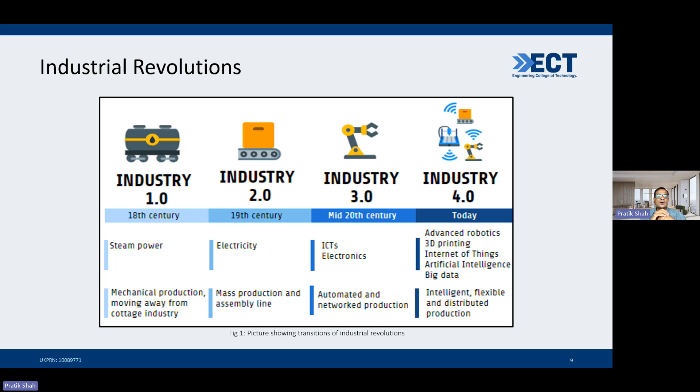So Industry 5.0 basically is an adoption of Industry 4.0 which is more human centric, more sustainable and more resilient. When I say more sustainable, the systems are meant to reduce the use or wastage of energy, and give sustainable solutions pertaining to environment friendliness, right? So with that, I come to what I normally call the building blocks of Industry 4.0.

Industry 4.0, as discussed in the previous slide, consists of the Internet of Things, IIoT, or you can say Industrial Internet of Things. Again, it has got a subset which consists of AI and ML, artificial intelligence and machine learning. Though we are not supposed to go into the details of each and every building block of Industry 4.0, we know the role of AI and ML, right?

We now say that machines which normally run for years are now bound to learn something. There is machine learning coding done which trains the machine to learn from the mistakes that it makes. It trains the machine with the help of AI codes, and it also helps in performing the task in a better way, right? We do have robotics as one of the components.

Data analytics: we say that today is the era of data, where data plays an important role, right? Because all of these are connected. When you have got a huge amount of data, only then can you go and build AI ML models, right? Cloud computing, AR, VR, that is augmented reality and virtual reality. I'll talk about this in my lecture also. We also have got blockchain, additive manufacturing, and system integration.

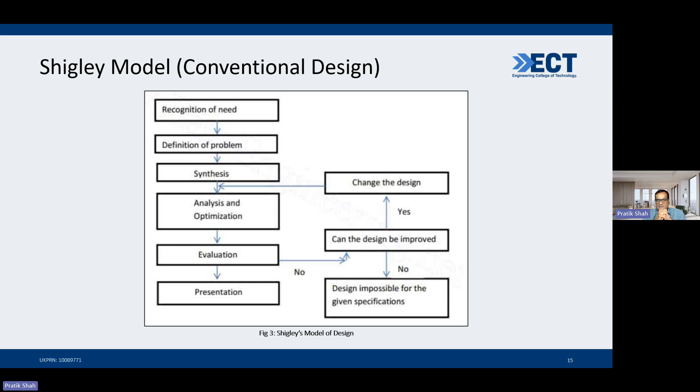But with the evolution of computer aided design, people now have changed the entire role of design pertaining to computer aided designing. So people normally say that when we create a model, it's basically a digital prototype. The first two phases though remain the same, that is the recognition of the need and problem definition. But the synthesis phase has now been taken up by geometric modeling.

We are having many softwares in the market which directly create a 3D model. So in the synthesis phase, where people used to use conventional drafters, drawing board, pencils, etc., they now use CAD softwares in order to create the solid models of the product. That would give a better visualization, better understanding of the product, what is being created.

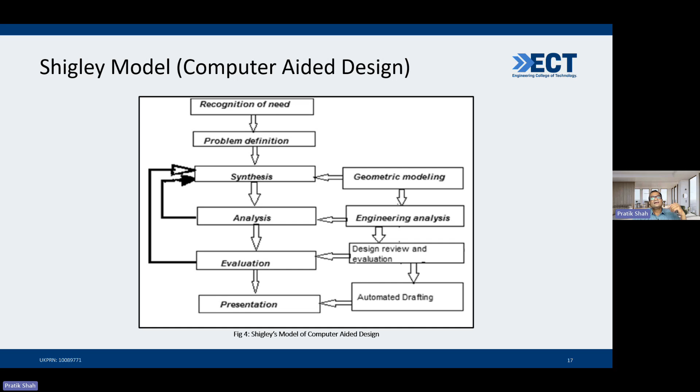Okay. So this is a brief about the evolution of CAD. It started way back in the 1960s. In the 1980s, we came up with a software called AutoCAD. AutoCAD is a product of the Autodesk company, and it is still widely used for creation of 2D drawings in industries.

Right? It is so popular nowadays that Autodesk has even made this software freely available. All the products of Autodesk are freely available to engineering institutes and engineering colleges. They are freely available for the professors and lecturers of the institute, and even for the students. So AutoCAD has got its own importance.

In the late 90s, solid modeling software like SolidWorks, CATIA, and Pro Engineer, which is now known as Creo, came into existence and slowly started taking over the designing phase. By the year 2000, the software became more collaborative and more interactive. And at present, what we are talking about is intelligent and

connected, where CAD systems are directly integrated with machines, and with zero intervention of human beings, they can create products. That has now been possible with the help of tools like augmented reality and virtual reality.

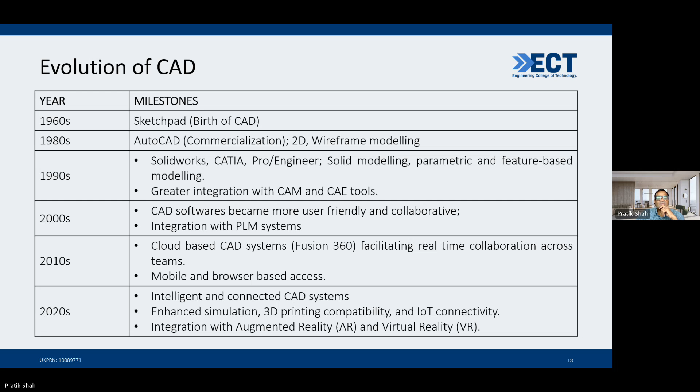I'm talking about these outputs for the purpose of letting you know that CAD is not only used for designing. It can also be used for creating various types of 3D models, that is surface models, wireframe models, and solid models. It can also be used for huge documentation; for example, if a company has around 200 parts which are to be assembled, it can easily help in creating the bill of materials. Again, rendering and visualization play a very important role in marketing the products.

So we'll talk briefly about the three types of geometric modeling features that are normally available with any CAD software. They are wireframe representations, surface representations, and solid representations. You can have a single product represented in all three ways: a wireframe of the object, a surface model, and a solid model. I'll spend 2 or 3 minutes on understanding this.

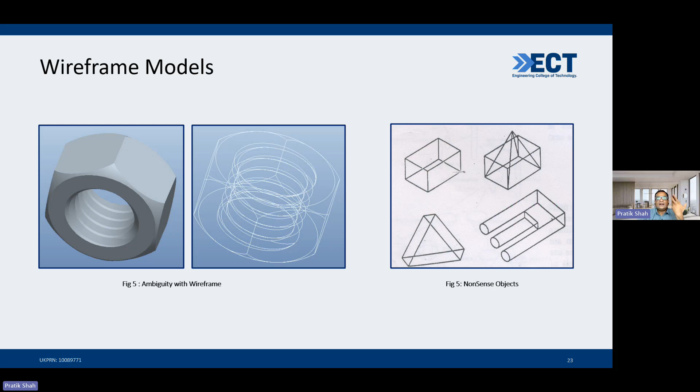It's basically a skeleton view, and to me, it's full of ambiguity because you cannot separate out the front face and the back face. All of them are shown with the same shade of line, posing some ambiguity in interpretation. So it was always used when there were issues of memory or storage.

So basically they were visual representations of 3D objects with only lines and edges. There were no surfaces, no planes, no solids. They were simple and faster to create. They were like a skeleton where all the hidden surfaces were also seen on the same face. But this created ambiguity, as several lines in different planes were seen on the same face.

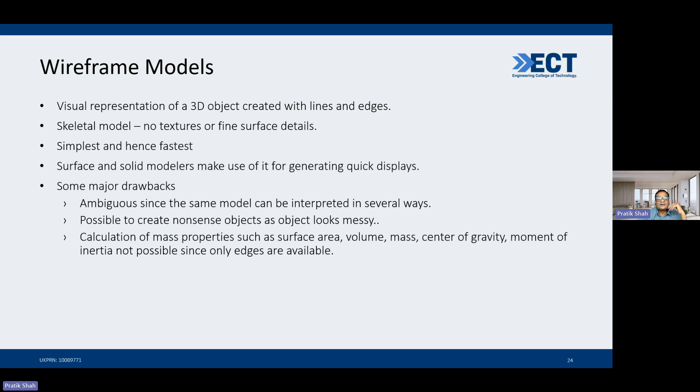Again, calculation of mass properties, volume, or center of gravity, which modern tools or a solid model give you, were not available. I just talked about a drop test of a mobile. In that case, the center of gravity or CG is very important. You won't be able to directly calculate the center of gravity. It is now normally done with the help of solid models.

Again, you can see an assembly of gears, which is in wireframe. And there is also an exploded model of a car, which is in wireframe.

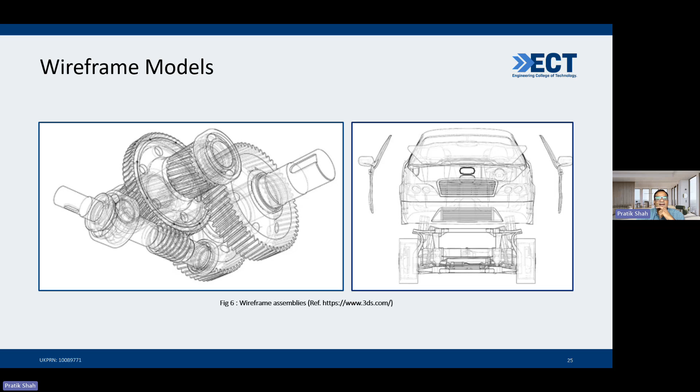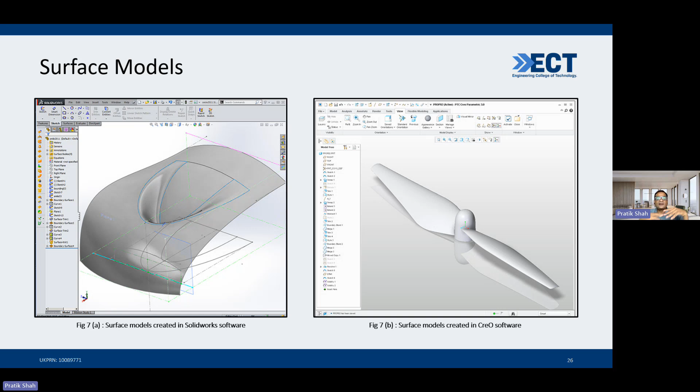This kind of model is very useful when you want to create some aesthetic, good-looking, aerodynamic shape on the front panel of an automobile, so that when the automobile is moving on the road, it will easily cut the flow of the wind. The ancient cars did not have aerodynamic shapes, and the flow of air was resisted by the body itself. With surface models, it's now very easy to create aerodynamic and aesthetic shapes used in sheet metal.

If I talk about the applications of surface models, they are widely used to design car bodies and the interiors of the car. They are also used in aerospace applications and for consumer products. Any casing, be it a microwave, a refrigerator, or an air conditioner, they're all designed as surface models, normally in industrial design where styling is a component of great importance. It is defined by just the outer surface, and it does not have any volume or any mass.

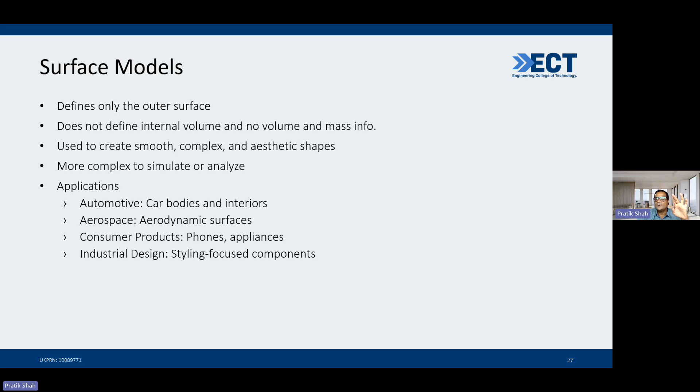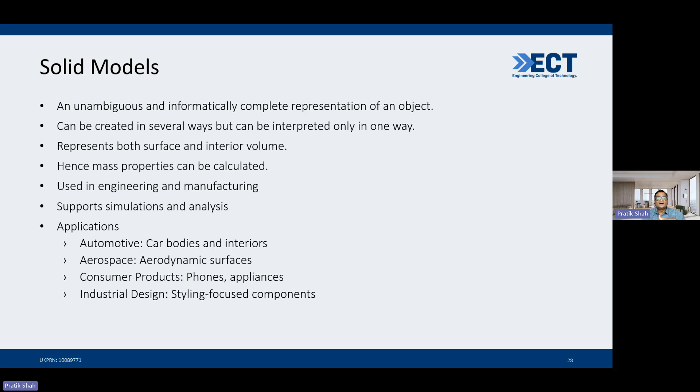Whereas solid models give you much more clarity compared to wireframe models. You can measure the center of gravity, you can even measure the mass of the body. You can change the material, and as soon as you change the material from steel to copper, the mass will automatically change. So it's so flexible that it will also help us in calculating the weight of the entire assembly or the component.

These are solid models created in different software, and this is how normally a solid model would look like, wherein you can section the solid models to see the internal parts.

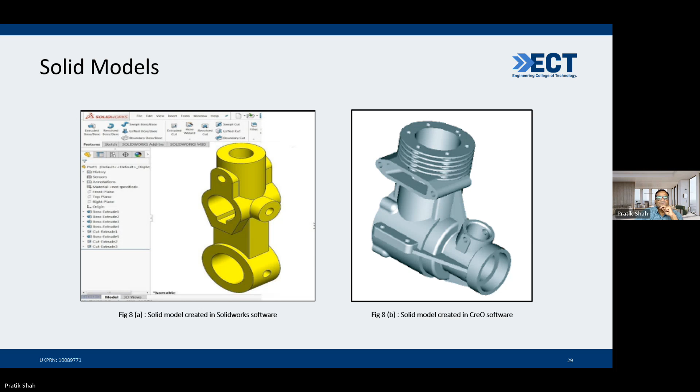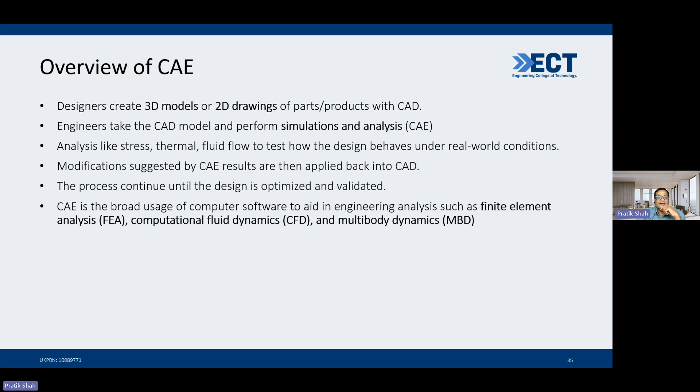As we know, there are basically two methods of doing an engineering analysis: one is the analytical method, and the second is the numerical method. Analytical method is the method that uses set rules, set principles, set algorithms, using standard equations. Let's say, for example, a uniaxially loaded shaft by load F with cross sectional area A. If I am supposed to find out stress in it, I normally use an equation, sigma equals F by A. That is, if I'm using standard equations to solve an engineering problem, it's the analytical approach.

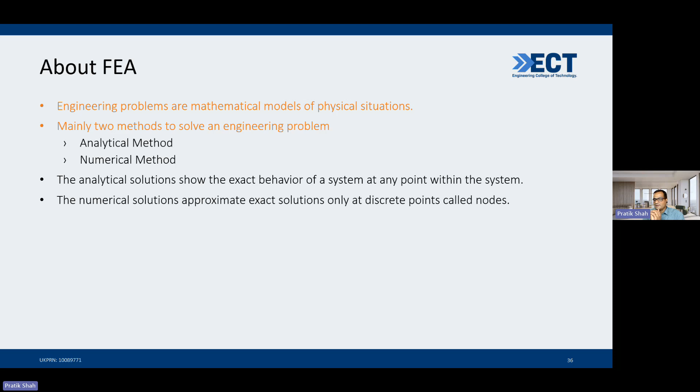Whereas numerical approaches are basically by the use of finite element method. FEA or FEM is a numerical approach.

Now, what is FEA or FEM? Finite element analysis is the process of predicting an object's behavior based on calculations made with the finite element method. While FEM is a mathematical technique, FEA is the interpretation of the results of FEM. The backend method that works with any FEA software is FEM, and the output that you are seeing is basically the analysis.

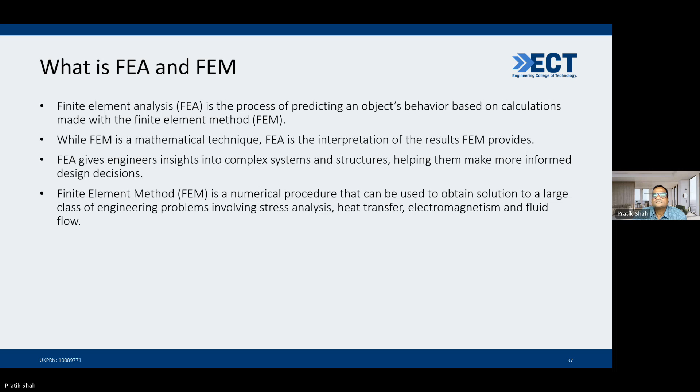Okay, right. So where do we apply FEM? They are widely used in any engineering problem. To me, there are no engineering problems where FEA cannot be used. They are widely used for both structural and non-structural problems. You can use them for static and dynamic analysis, for buckling problems, for stress analysis in case of bridges, buildings, aircrafts, etc. You can use it for non-structural problems like heat transfer, that is thermal analysis, and fluid flow analysis.

If we are supposed to visualize the flow over an airfoil, or let me talk about it in a simpler way, if we want to find out a volume filled with liquid in a cavity, and we want to have some lid over the cavity wherein there is some flow of fluid, and if I want to simulate that, I can do that. It is again used for manufacturing analysis, biomedical analysis.

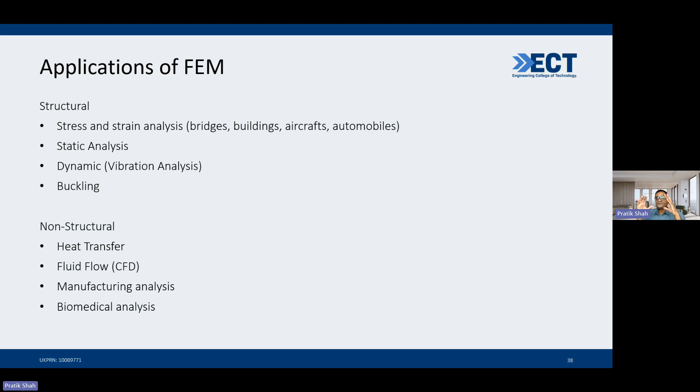I have not listed many of the applications over here, like vibrational analysis. It is even used for acoustics analysis, electromagnetic analysis. Various softwares are there for these specific or specified tasks.

The FEA process basically takes place in three steps. The first is known as the pre-processing phase, second is the processing phase, and third is the post-processing phase.

The pre-processing phase is where you need to define a geometry. So first is CAD. You need to have a model ready in the computer, and that model can be transferred to a software which does the analysis. So we will be having a model which is then taken into a CAE software.

In the processing step, we need to apply typical boundary conditions, and then you need to see how these conditions can be applied. So you need to control the physics. You need to identify the physics working on the part of the component.

And post-processing is once the software does the analysis for you, it is up to the engineer, or the CAE engineer, to interpret the results.

These are the basic steps. The first step is you need to create a model, a solid model. Then the next step is you need to divide the entire model into small pieces, which is why it is known as finite element. The small pieces into which it is discretized are known as elements.

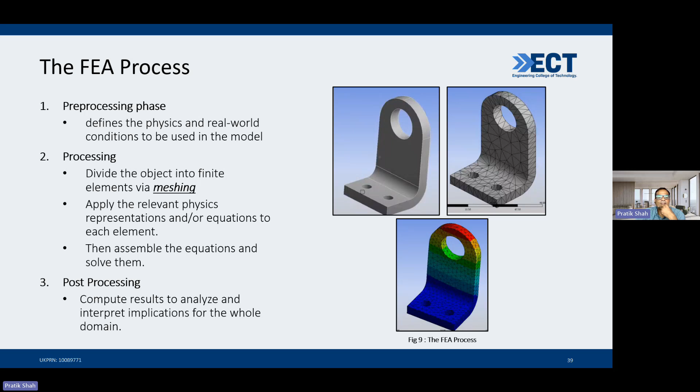This is a case study of a crank used in a bicycle to connect the axle of the bicycle to the pedal. So if we are interested in simulating the analysis of this particular bracket, then we need to create a model of that bracket.

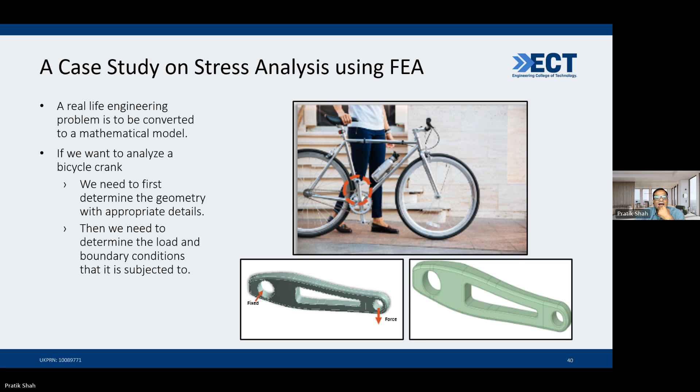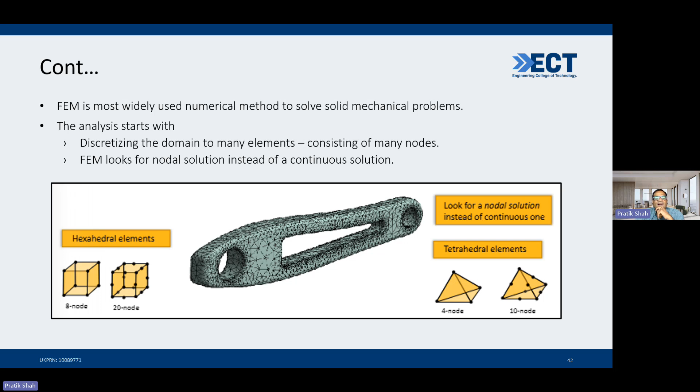After creation of the model, we need to divide it into a number of pieces. I am not going into much detail of FEM because FEM is an entirely different topic, which would take 2 more hours. But for basic understanding, there are various standard shapes available, and the model is divided into pieces using these shapes.

And then the proper boundary conditions are applied, the right kind of loads are applied, and the analysis is carried out, which will ultimately give you something like this, which then needs to be interpreted as a color band.

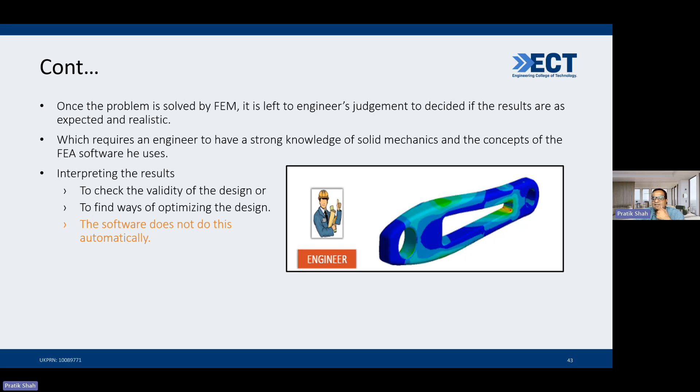The software is not going to do that for you. There is still no artificial intelligence imbibed in such software, so it is left to the engineer to identify the results given by the software. These different zones of color or shades will be indicating different levels of stresses.

Various software are available in the market, by and far ANSYS has the major market share as far as FEA software are concerned. But there's also Abaqus, Nastran, Pro Mechanica, CATIA, and others.

So challenges pertaining to FEA mainly are that the output is only as good as the input. I normally say in my lecture that it's garbage in and garbage out. It highly depends upon the accuracy of the method in which you control the physics; the capacity of your approach to the problem will largely dictate the efficiency of the results.

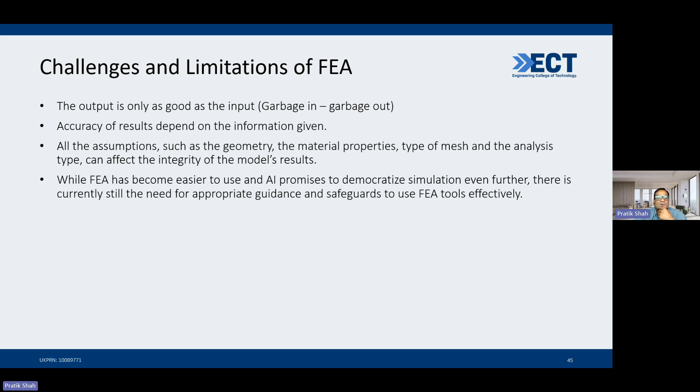While FEA is becoming easier to use, the promise to democratize it eventually is still not persistent, because it has not become so intelligent that it will interpret results for you.

I normally say that FEA simulation is like a battlefield. On a good day, you might not lose anything, but on some days, you may hit two mines with both of your feet.

We will be having a separate stage where we'll be discussing FEA and simulations. But let me move to the next phase, that is CAD data exchange formats. I am persisted to explain this because when we talk about two different softwares...

Let's say I am having a Word document. I know that I cannot open a Word document into an Excel file, or an XLSX file into a PowerPoint file. Similarly, a model created in Creo or CATIA cannot be opened directly into an analysis software. So we have something called data exchange files, or data exchange, which helps in interoperability, or transferring models from one software to another.

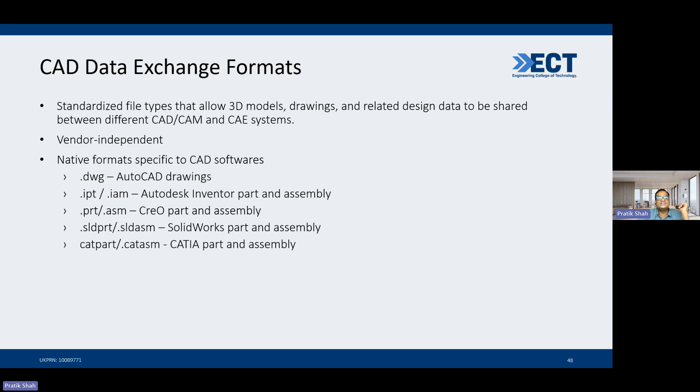I have just given in this slide some standard extensions of various solid modeling softwares, like AutoCAD drawings will be DWG, Inventor would be IPT, Creo parts will be .prt, etc. Now, if I'm supposed to use these same files and open them in ANSYS, I require some data exchange formats, right? Data exchange formats are basically standardized.

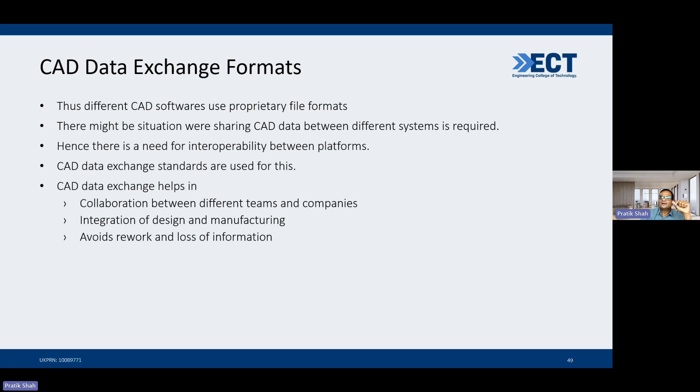And why do we have them standardized? Because they are acceptable to any part of the country. They are even acceptable to different countries. So when I have got such a data exchange format, I can always save the files into that format, which will be readily acceptable by different software.

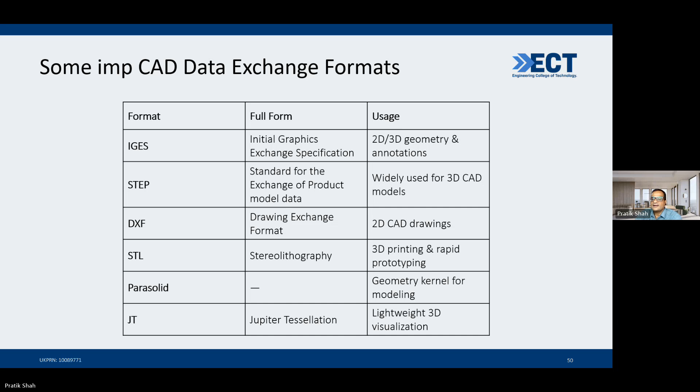Computer-aided manufacturing, again, is the use of computers in assisting manufacturing. When I say assisting manufacturing, it basically comes to precise manufacturing with high tolerance and high accuracy, required by aircraft parts and automobile parts. They are normally manufactured with the help of computer-assisted manufacturing tools.

When we talk about computer-aided manufacturing, or CAM, there are three basic technologies. One is known as NC, which is only numerical control. CNC is supported by computer numerical control methods, and CNC is basically integration between CAD and CAM. When we talk about numerical control, there is no computer in the picture. You should have your machining codes typed on a tape or in a pen drive, and you need to directly import it to the controller.

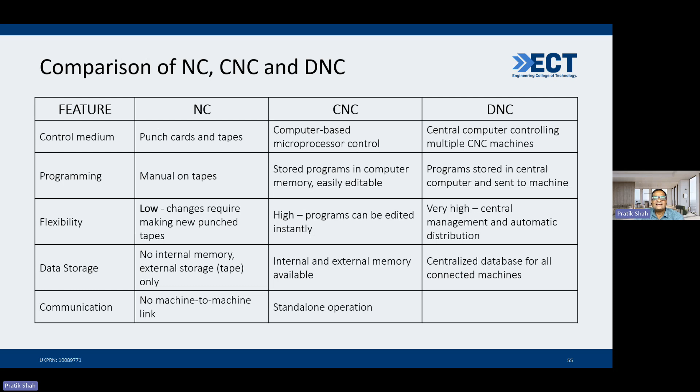And DNC is direct numerical control, where you will have something like a master and slave situation. One master computer will be governing multiple computers, multiple CNC machines. These are brief comparisons of NC, CNC, and DNC, which you can go through.

Now I'm talking about the basic workflow of CAM. As I talked about, the prerequisite of CAM is CAD. Before you start with computer-aided manufacturing, you must have a computer-aided design model readily available, right? And when the model is available, it is assumed that it has been analyzed and optimized so that the product can be manufactured.

The first step is CAD model import, where we import the CAD model designed in a modeling software into a manufacturing software, followed by process planning, wherein we do the tool selection. If your component is to be face milled first, and then you need slab milling, or to create some step or some holes, then first you need to take an end mill cutter, then a drill tool of the required size. That is what we mean by process planning and selection of tools.

After that, the software will generate the tool path for you, which helps us in simulations. That simulation helps us identify whether the tool is fouling or accidentally hindering your manufacturing setup. Last, we have the machining, right?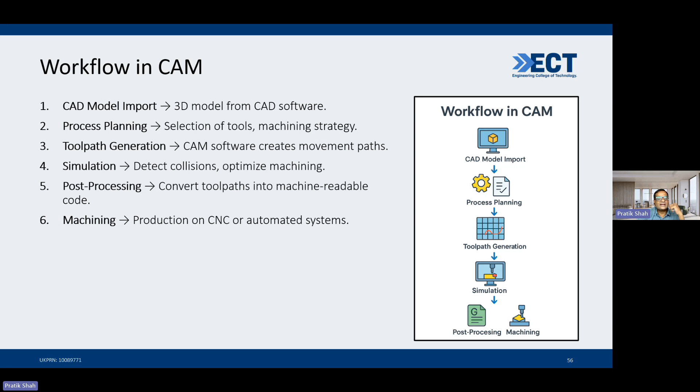I'll have a brief demo of all of this in the form of a video which I have already created in respect of time, because I knew I won't have much time to demonstrate it live. This is a step-by-step explanation of each step.

Starting with CAD, you have CAD softwares like Autodesk Inventor, Dassault Systèmes, Fusion 360, etc. You need to save it into a standard data exchange format like STEP or IGES, and then import it into softwares. Here you can see softwares like Mastercam. These are all manufacturing or CNC machining softwares: Mastercam, NX CAM, Fusion, NX. There are various softwares. The most popular, to me, is Mastercam.

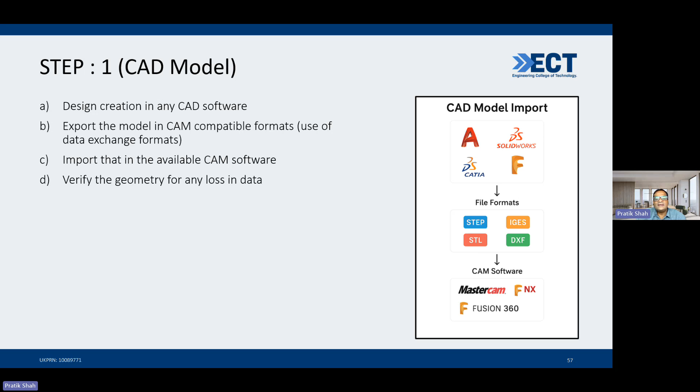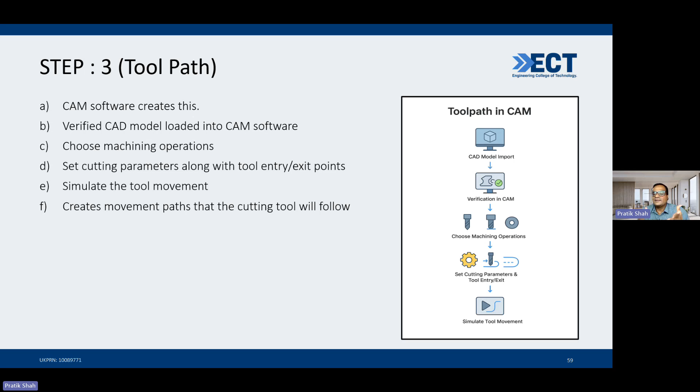Second is selection of tooling, depending upon the process plan prepared for machining the entire component, followed by toolpath. The software will automatically create the toolpath for you, and it will help us in setting up the cutting parameters. When we talk about machining, the parameters are cutting speed, cutting feed, and depth of cut. So it helps us in doing that.

Followed by simulation. Simulation here will show you the toolpath, right? Various software take the help of different colors in order to show the toolpath. This toolpath will mainly be used to detect any collisions.

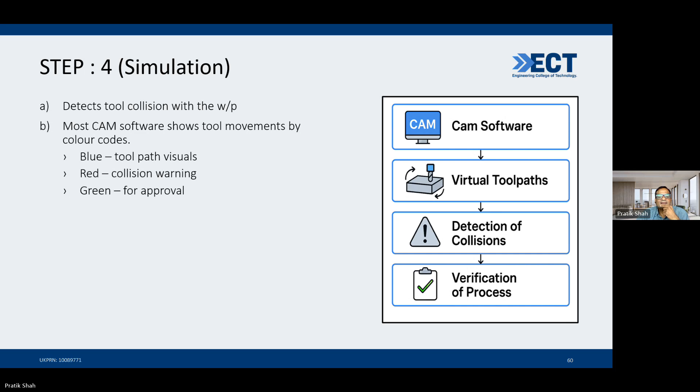Followed by post-processing. Post-processing here means creation of machine codes, right? By the way, CNC machines will work on specific programming codes known as M codes and G codes. Many of you might be aware of M codes, which are known as miscellaneous codes, and G stands for preparatory codes.

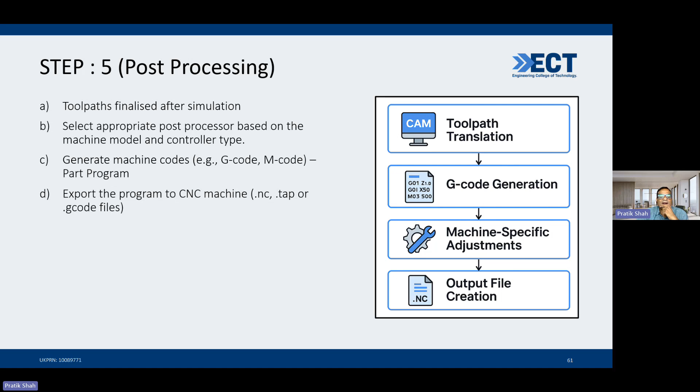These are a few examples of major widely used G codes and M codes, right? M are miscellaneous, which are used for preparations of the machine, like tool change, turn on, turn off, end of the program, while G codes are basically used to control the movement of the tool to machine the surface.

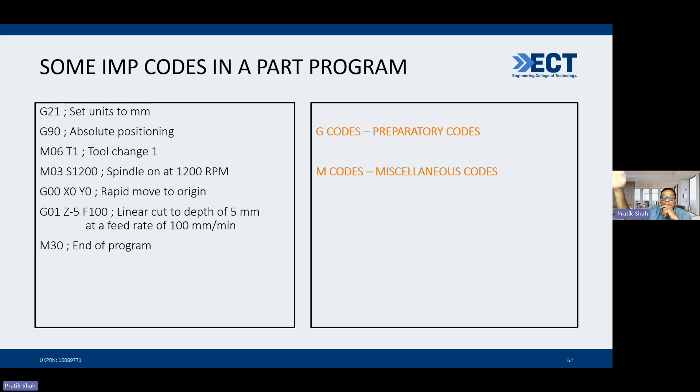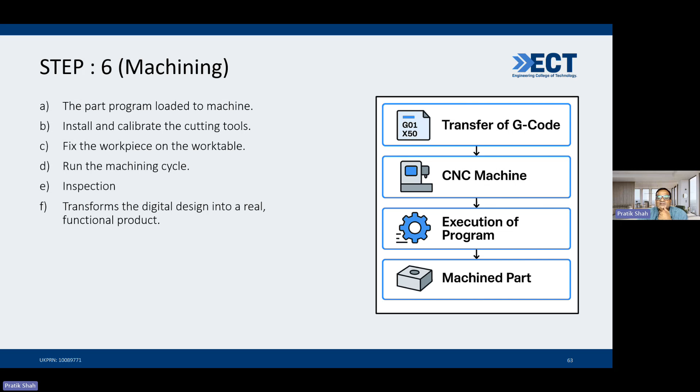Last, it has to take the form of machining, where the codes, M codes and G codes, are directly transferred to the CNC machines, and then they are executed on a program.

I have taken very few operations, right? There would be a facing operation, a turning operation, a taper turning operation. There are 3 or 4 different operations, right? But you can have a feel of it that if there is any complicated part, then also it can be easily done, right? I want your help in sharing the video that I have mailed you.

Okay, let me just check if I can share it from my side. Please hold on 2 seconds. Because I was just trying it before the presentation, but I found that it was difficult for me to do that. It wasn't working. Okay, let me just check on my side. Please just be patient with me while I check. Can I do it by directly sharing my screen? Yeah, you can definitely do that. Yes, please help me out.

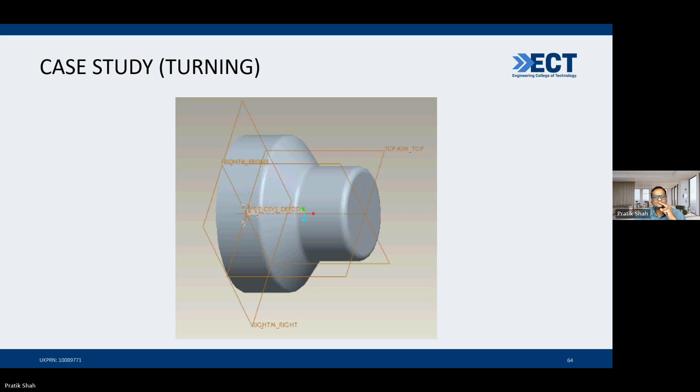Okay, can you see next to the leave button? Share. Yes, it's gonna say share content and then you'll select either the screen, window or tab. Okay. Should I share my entire screen? Let me rather share it on my side. Okay, that would be so nice of you. Okay, let me do that. Please hold on. Yes, there we go. Can you see it? Yes. Okay, perfect.

So before I start playing this, I have used a software called Creo, which was formerly known as Pro/E. It is a product of PTC, that is Parametric Technology Corporation, and the software is widely used in North American countries and in European countries.

I have started with an already created solid model, and I am then importing it into this software, and I'll show you these 6 different steps that I talked about. First is CAD model generation, which I have already done for you. I will be importing that model into this machining software. I will show you how process planning or tool selection is done, followed by toolpath generation.

Then I will also show you the simulation, wherein it will detect any collision if it is there, followed by post-processing. So I start playing the video, and the video is muted. I will just give some basic hints of what is being done.

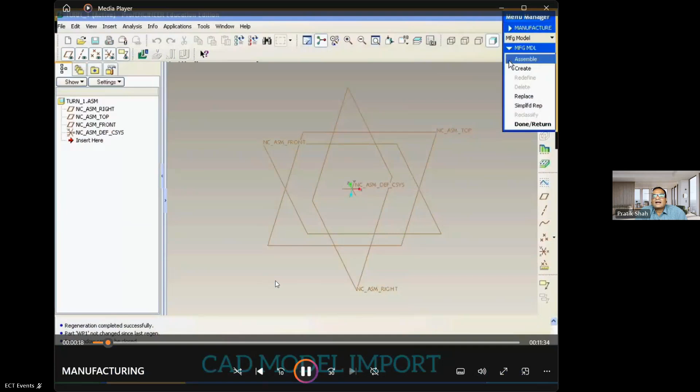Okay. So this is how I have started. I am bringing the already created model into the software. This turn 2 is the part which I have already designed. I have brought it into the CNC, or say CAM, software. The part is now available.

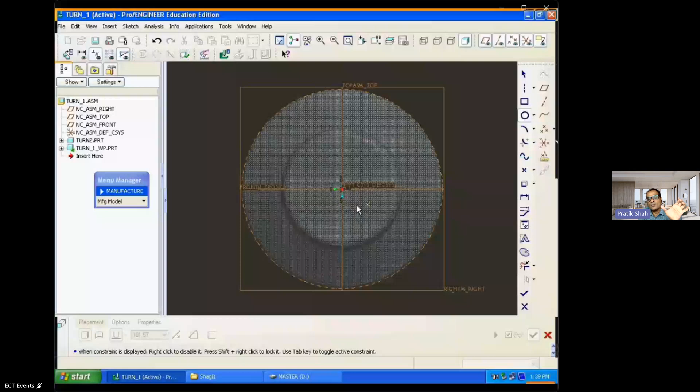I am naming the part. That is, I am just creating a workpiece. I have also mentioned the tips for you. You can see the creating the workpiece. Why creating the workpiece? Because this was the original part that I want to be machined. So the workpiece needs to be of little larger dimensions.

So I am creating a workpiece which is of little bit larger diameter, which has got some tolerance of 5 to 10 mm, both in the length as well as diameter. So you can see a light yellow workpiece created. Now it is green, and inside that is enclosed my part which I want to machine.

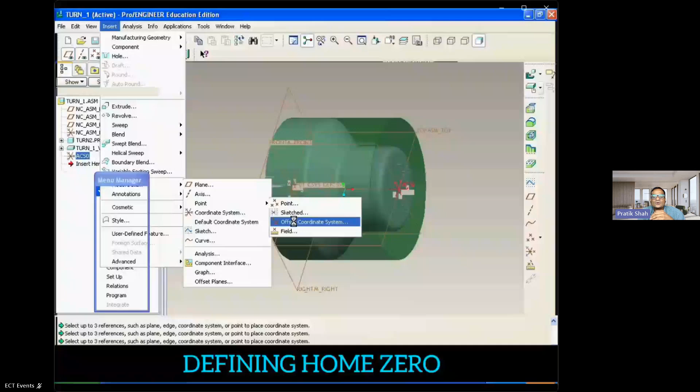Now what I am doing is basically creating the home 0 and the machine 0. I'm defining the home 0, right? People who are already into this profession, or who are operating CNC machines, know that home 0 is basically used to take the tool when the machining operation or a set of operations are completed. So normally it is 5 to 10 millimeters away from both the axes of the job.

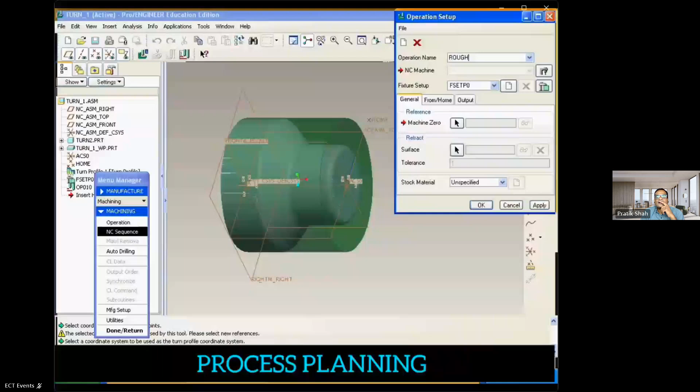I am now just setting up. This is rough cut, so I'm just naming it as rough machining. This is phase number 2, that is process planning. I have selected the machine type. Normally, such cylindrical parts are machined on lathe machines.

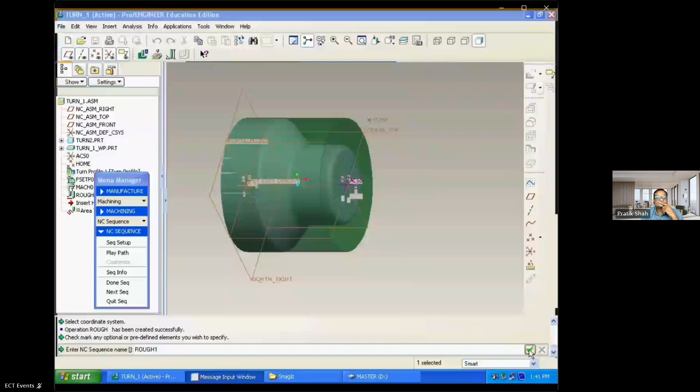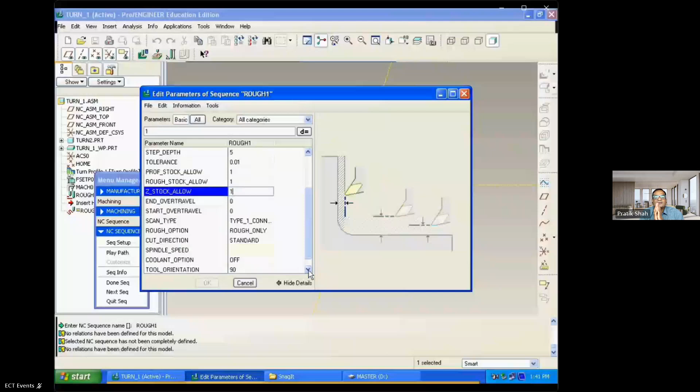This is tooling setup, where I will use all the tools which are required, and I also need to specify the tool geometry like rake angles, clearance angles. This is selection of cutting parameters like feed, speed, and depth of cut. Right? You can see the depth of cut selected as 5 mm. So it will only cut 5 mm in one cut, move back, then again take a cut of 5 mm. I am defining the spindle speed as 1500 RPM.

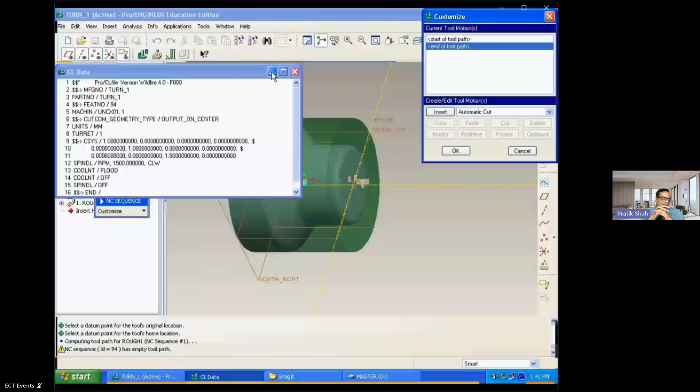So by that I have selected the process plan, selected the process parameters, and now I go for creation of the tool path. Tool path generation.

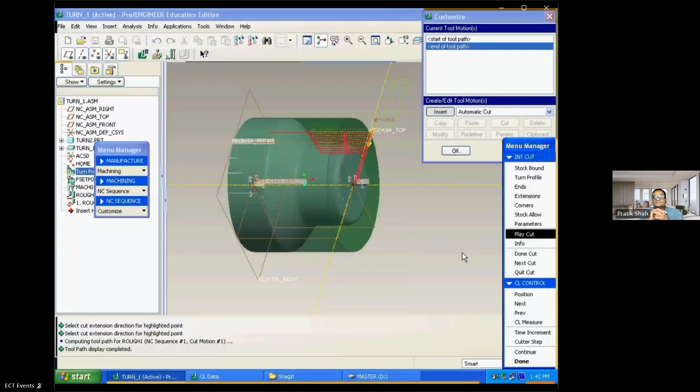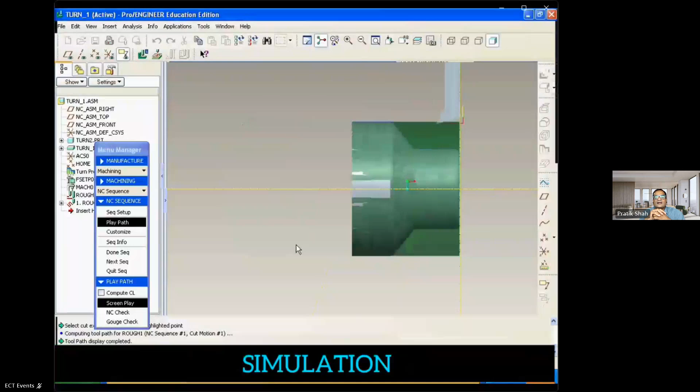So you can see a single point tool coming into picture. I will just turn the view. This is a 3D view. I will just turn it to front view. I will change the orientation. See how the simulation works. It will show you how exactly step by step 5 mm depth of cut will be taken, and it will be removing the material.

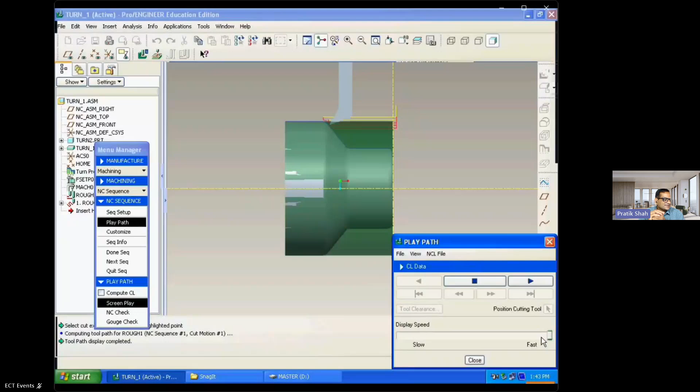The tool is retracting back to the home position. It's basically due to the bandwidth issue that it is moving a bit slower. The video is in bit faster mode. Every time it is retracting back to the home position, taking a 5 mm depth of cut, and then again machining it. So this is what a simulation or toolpath generation means.

So that was the last cut. And now it is also going to do the facing operation. This is facing cycle, right? Because we also need to face the perpendicular surface to the axis. And it has to be only taken up to the center, right? Because the job would be rotating.

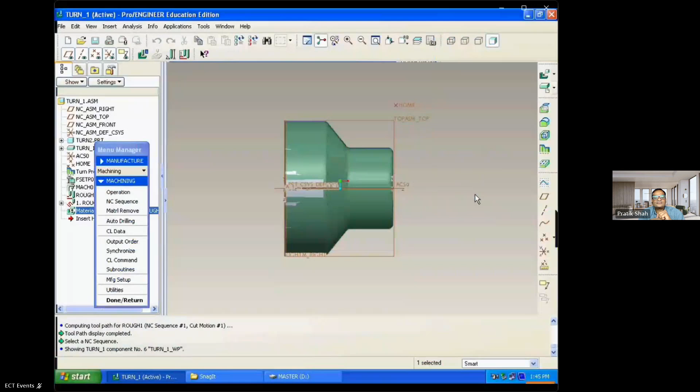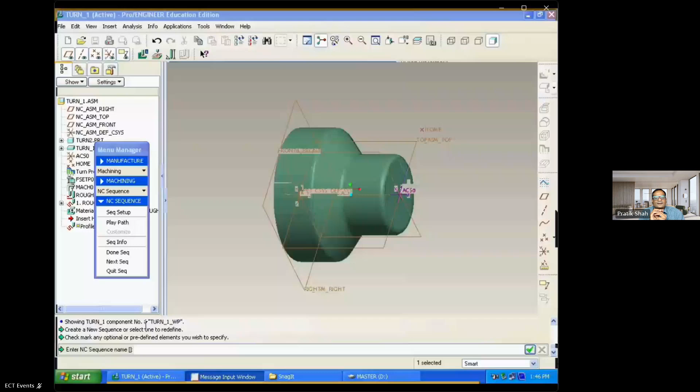Next would be finishing cycle. See, this is how the rough cut has taken the shape. Similarly, we need to again define the finishing cycle, wherein the depth of cut would be different. This is finishing.

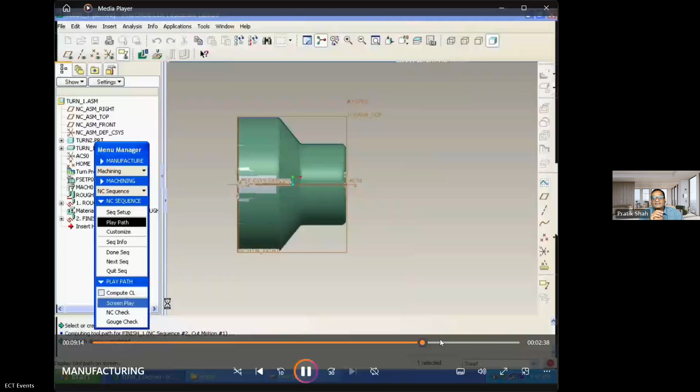Kumo, you can just move ahead a bit. You can just fast forward this because it is the same repetition. Again, the tool selection and everything. Okay, no problem. Just let me know. Is that fine? Should I go forward? Yes, please. You can move ahead. Okay, should I close the video? Yes, you can do that. Okay, I've closed the video. Should I bring back the slides now? Yes. Okay. Let me bring back the slides.

So this is what I was showcasing, how a digital prototype can be taken into realization, right? The toolpaths would now be converted into machine codes, and the machine codes are then fed to the machine. So the worker or the engineer working on the machine only needs to clamp and unclamp the workpiece.

I'm just waiting for it to upload. I'm not sure as to why it's taking so long. Okay, there we go. Just let me know when you can see it, okay? Yes. 2 or 3 more slides. Okay, could you kindly take control from your side? Yes, I have done that in the meantime. Oh, you've done that. Which slide were you on? I was on page number 54. 54. Can you see it? No, it didn't move. Let me do it on my side. It won't take more than half a minute. Okay, then please take control from your side. Yes, I've done that.